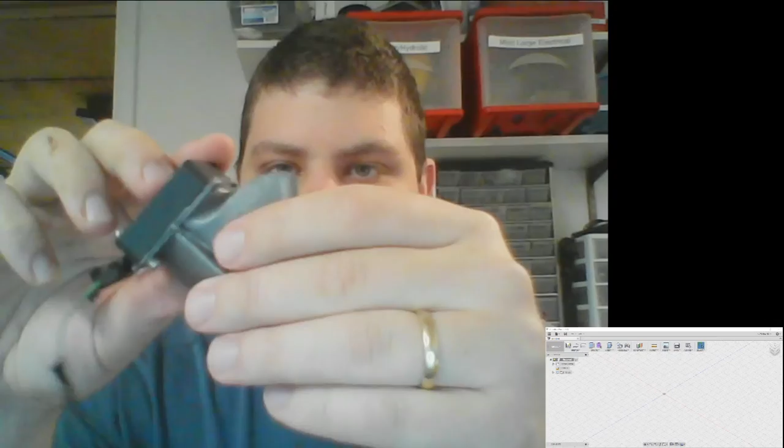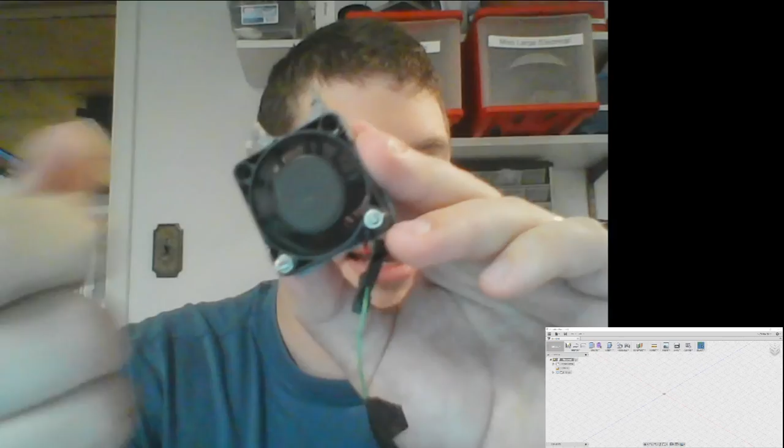He mentioned making a part fan, and I'm pretty sure he's talking about a fan for a 3D printer similar to this one. This was a design I took from Thingiverse when I was just starting on my first RepRap 3D printer. You can tell it got melted from falling off and getting hit by the hot end. But I think the idea is to have a fan on the back and then some sort of funnel to make the air go where he wants it. If this isn't what you wanted, I'm sorry, but I'll still show you the Loft tool.

So let's go over here to Fusion. I did a quick overview of the Loft tool in my last video when I made the fuzzy cat toy, but it was really brief, so I'm going to go into more detail here. I'm not going to actually print whatever we design here, I just want to show you all the details on this. First thing we need to do is create profiles.

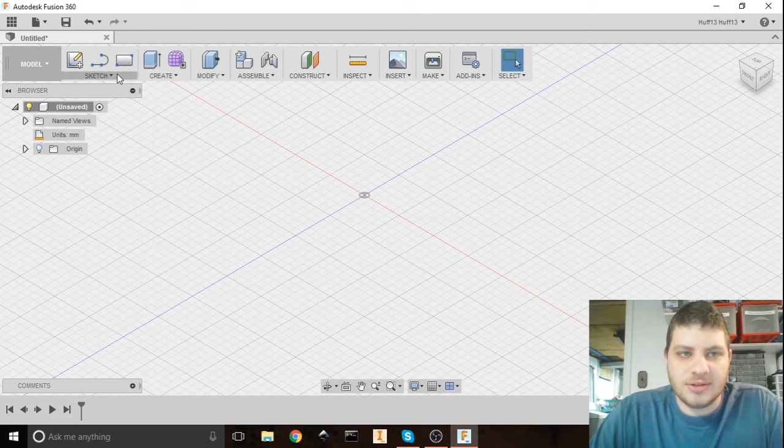This is what's going to determine the shape of our loft. So for the fan, we're going to start off with a center rectangle, and I'm going to do that on the bottom plane here, right in the center. Those cooling fans are normally 40 millimeters, so 40 by 40. I'm going to hit stop sketch.

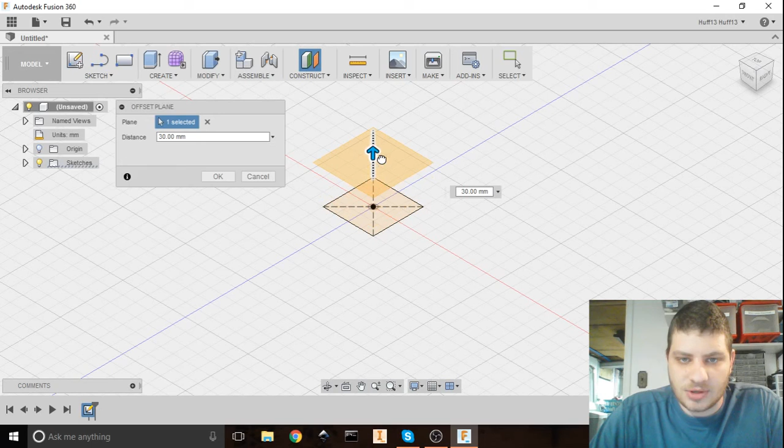There's our first profile. I'm now going to do another plane here, so I'm going to do an offset plane, and go up some, let's say 30 millimeters. So that's just a construction plane.

On that, I'm going to hit the line tool, and now I'm making a sketch on that plane. So I'm going to come out to the side, make a line here, and hit stop sketch. I can use that line to make another plane.

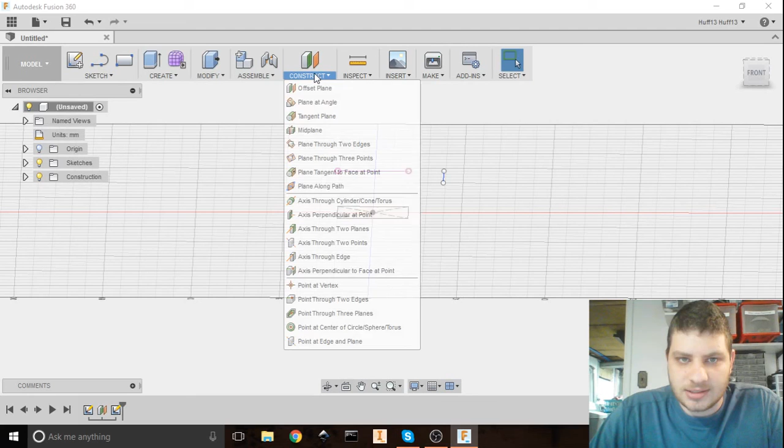I'm going to hit construction, plane at an angle, and I'm going to click on that line. Let's go 45 degrees. Hit OK. Now we have a plane at an angle, which I can do another sketch on.

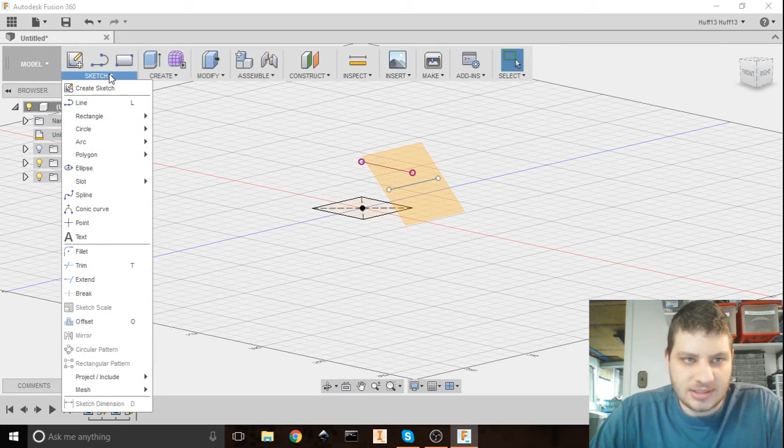This time I'm going to do a circle, circle by center. Click on that plane, and I'm just going to make a circle wherever I want, let's make it smaller, up there. Stop sketch.

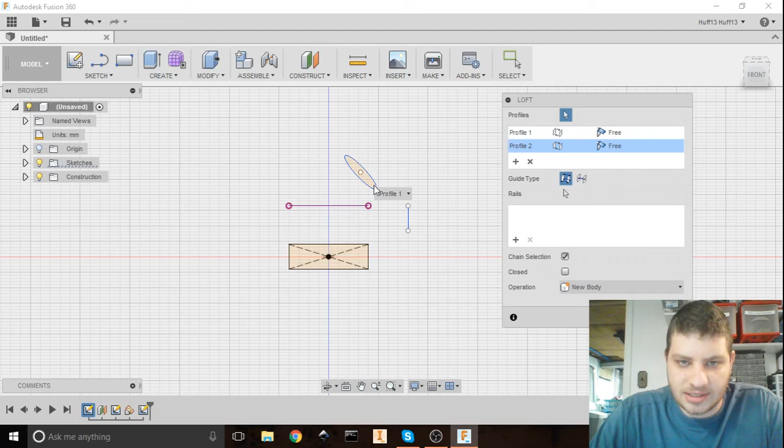All right, so now if we go into the Loft tool, create Loft, click on the first profile and the second profile, that is a loft. So this is the default setting, the most basic way to do a loft.

You'll see that it makes a straight line from the first point to the second point, which might very well work for what he wants to do. There's a couple other things we can do now that we have this first loft built.

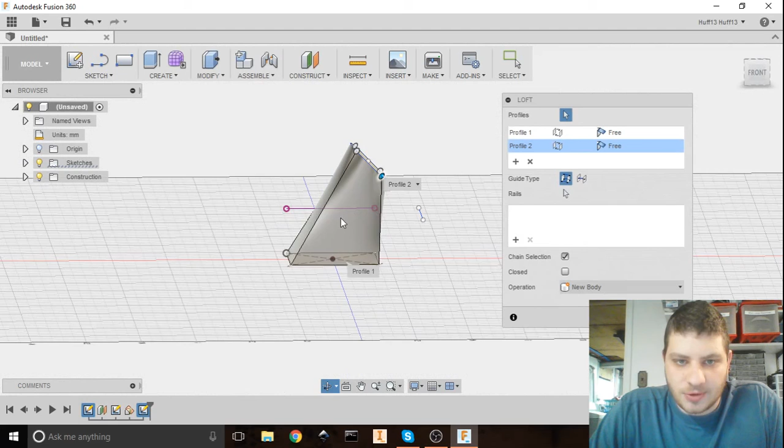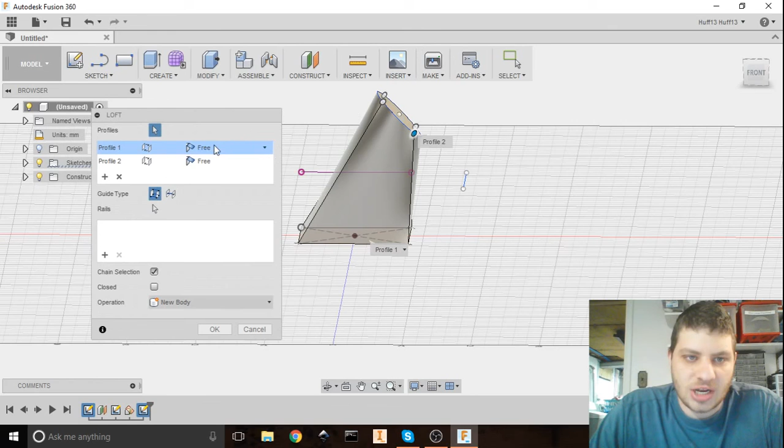If we come over here to the Loft menu, you'll notice a couple things here. Let's first look at where it says free, that is the ending condition. You can set the continuity on how these match up. So if we go to direction, now it's making sure that these guide rails are perpendicular to that surface, and this surface down here.

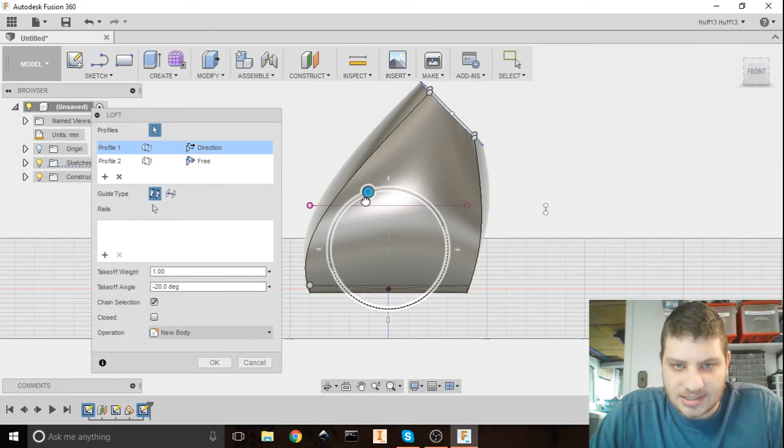So we can actually adjust that and change how it sees the continuity, and that'll change our shape ever so slightly. If you go too far, it'll freak out because you have a weird surface here, it would be looping back around on itself. Lofts can sometimes be a little bit fickle, especially when you have sharp curvatures. If you're ever doing a loft, try to make everything as gentle as you can, otherwise you'll run into issues.

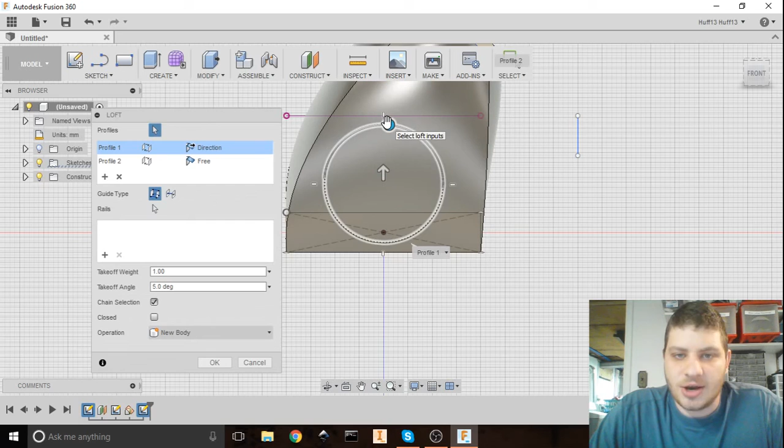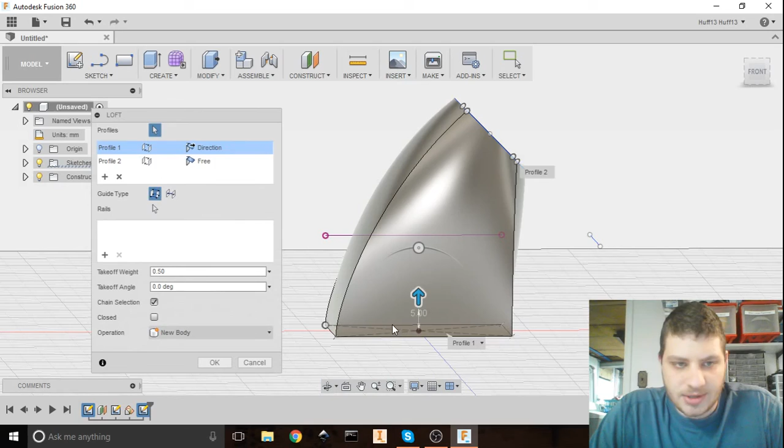So let's go back. We also have this arrow here, and that changes how far it waits before it starts trying to do the curve. Again, if you go too far, it'll throw you a warning and break everything. So let's bring this back down to zero. Oops, too far, there we go. And let's just go ahead and go back to free, so there's back to how we originally started.

You can also grab these guide rails here and move them, and that'll just change how your shape looks. On more complicated parts, that'll probably make a bigger difference.

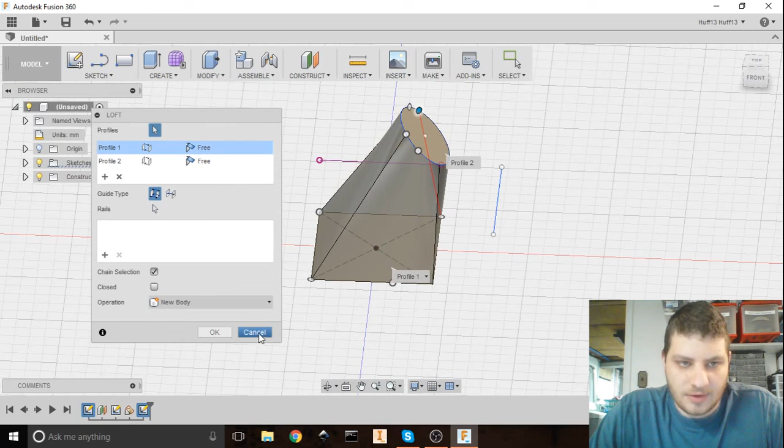All right, so I'm going to close out of this loft, and we're going to do something a little bit cooler, a little bit more advanced.

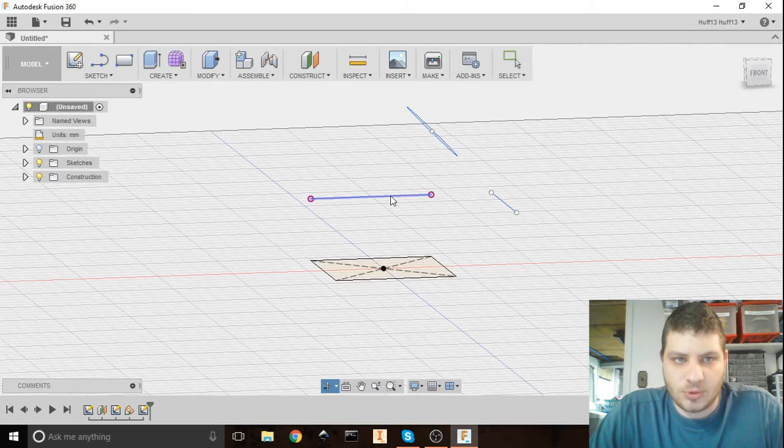I'm going to do a center rail from this point to this point here. The center rails have to be going through the center of each of your profiles. That is why I made the rectangle and the circle by their center point. There's another type that works almost exactly the same, where you do one corner or multiple corners, but it works exactly the same—you just define more edges.

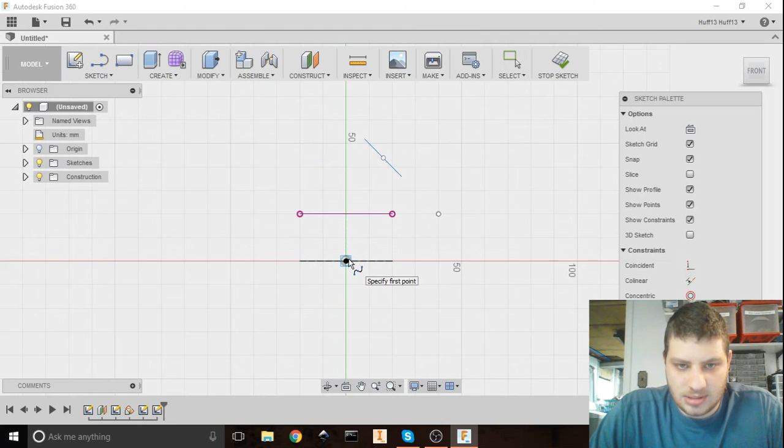So I'm going to make another sketch, and I'm going to do it on the plane that goes through the center points here. I'm going to click there, go up to Sketch, and find the spline tool. I'm going to make a point in the middle somewhere and click back on the center point. Now I'm going to hit right click, okay.

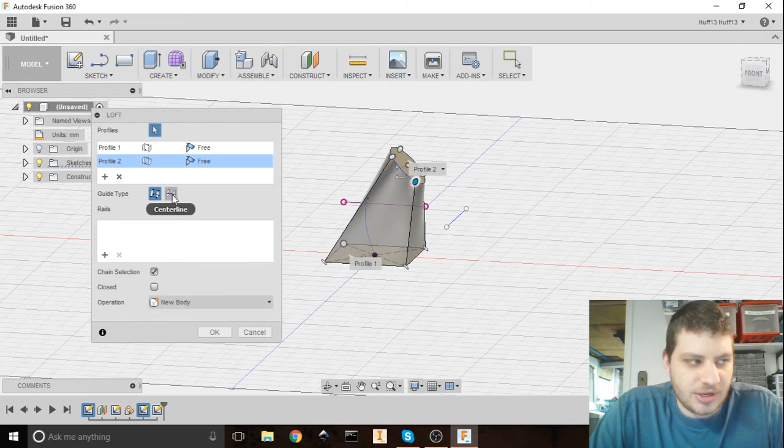So now we can go to the Loft tool. If we click on our first profile and then our second profile, we can go back over here and choose centerline. And then as our centerline, we can select this. So you see what that did to our shape there? Instead of going the shortest possible route from center to center, it followed our path here.

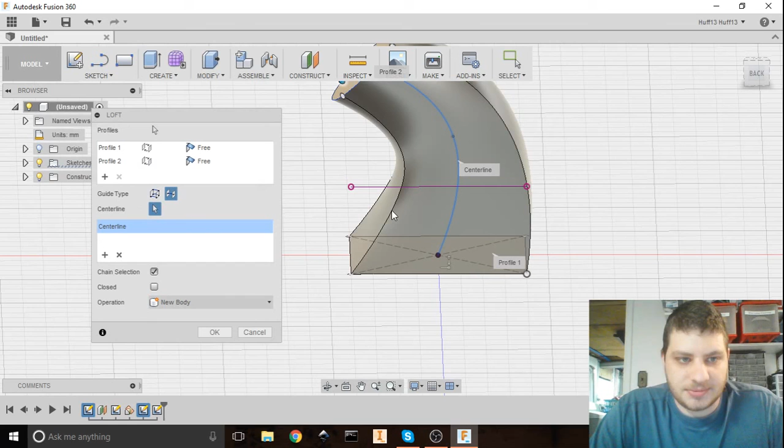So that's probably a lot more what you're looking for to make a fan duct. So I'm going to hit OK.

Let's go ahead and do one more loft. You could have made these shapes hollow to make a shell going through here so that the air could travel through, but let's go ahead and make that as a second loft.

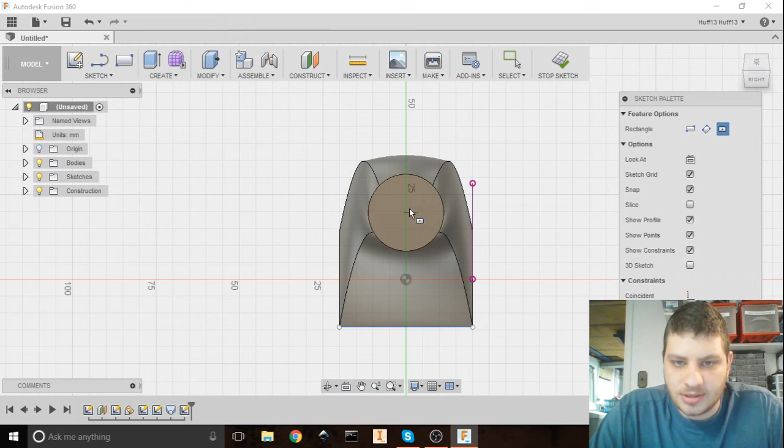So I'm going to hit Sketch. I'm going to click on this surface right here, this plane, and let's go ahead and make a square or a rectangle by center on that. This will be where the air comes out. And then I'm going to hit Stop Sketch.

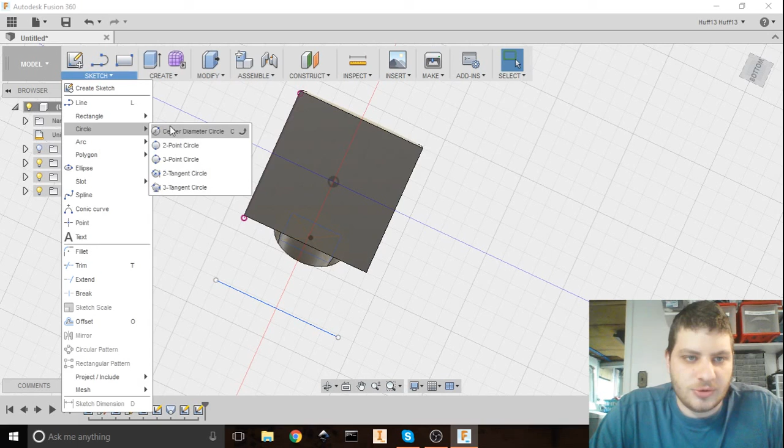I'm going to go back down here. I'm going to hit Sketch, Circle, Circle by center. Click on this—oops, try that again. We'll do circle by center and click on this bottom sketch here, or the bottom surface. We'll do a new sketch for the air to go through. Hit OK.

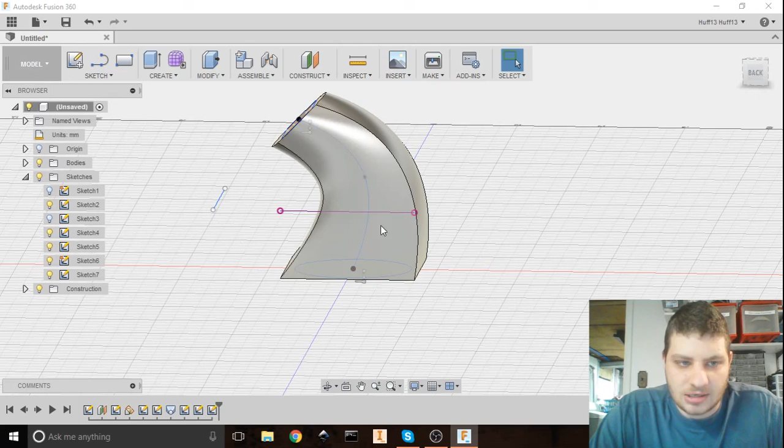And let's use the same centerline as we did before. So we're going to go to Sketches, and I'm going to hit the light bulb here for our centerline. That light bulb just lets us see that sketch and lets us use it again.

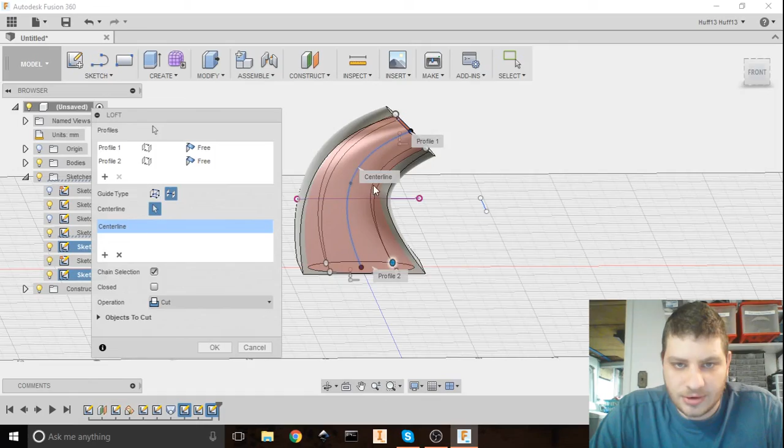So you can also do lofts as a subtractive measure, and that's what we're about to do. I'm going to click on my first profile and my second profile, and that's it without the rail. Let's go ahead and put the centerline on the rail, and now it automatically knew that it should be doing this as a cut.

You can go down here, you can change it from a join to a cut. You could have it as a new body or an intersection where just where they meet gets left. But we want to cut, and you can choose which objects to cut if you would like.

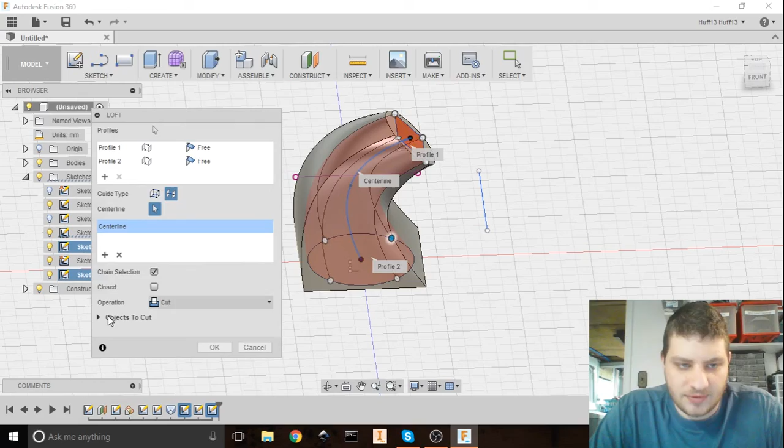And we'll get through there. That could be a fan duct now, with some mounting screws and maybe a little bit more thought put to it. Now, a few notes on the loft.

You can do as many shapes or as many profiles as you want. Again, like I've said, you have to be really careful on the curvature. If your curvature is too sharp, Fusion 360 will freak out and not be able to generate the loft.

Lofts can also be a little bit fickle if you're going back and editing the previous profile. So if you do that, make sure you save early, make sure you save often, and wait as long as you can before you actually do your loft. Otherwise, you might break things later.

The centerline doesn't necessarily have to be on a two-dimensional sketch. You can do that in 3 dimensions with a 3-dimensional sketch and come up with a much cooler, more useful shape.

Lofts are really a great way to take fairly simple profiles and come up quickly and easily with a really neat, organic-looking, professional-looking model that you can print or CNC out.